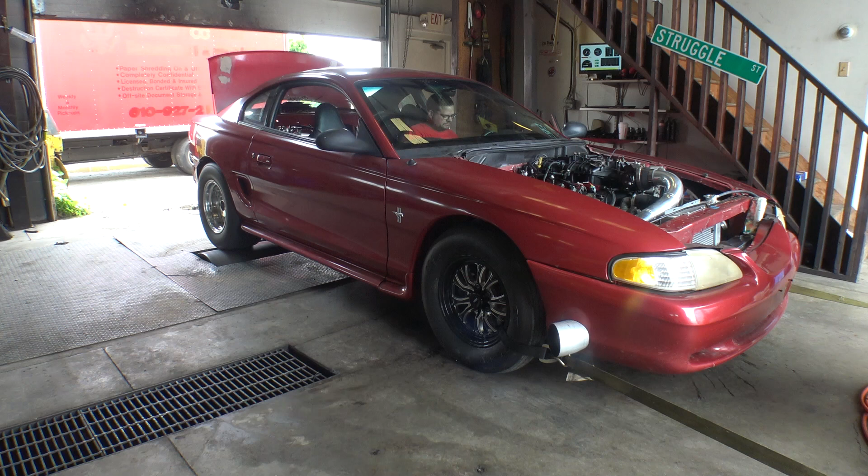That time, boys. Showtime. Oh, yeah. Oh, get her squared up.

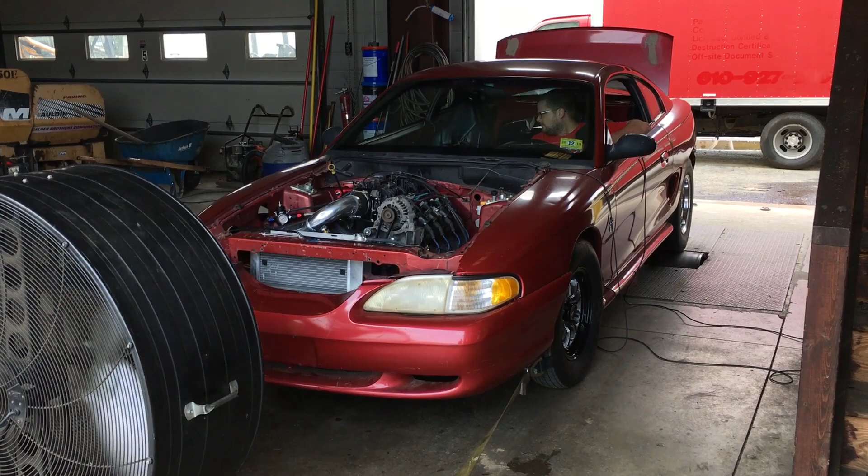Alright boys, so it was around this time we started noticing a significant misfire. A little bit at cruise and idle, and obviously a really crappy misfire once we tried to put it under load; we couldn't even make 6 pounds of boost. And we had spent most of the morning swapping out parts, starting with injectors and coils and plugs and a whole bunch of stuff. It did end up being the coil packs that I had were just awful.

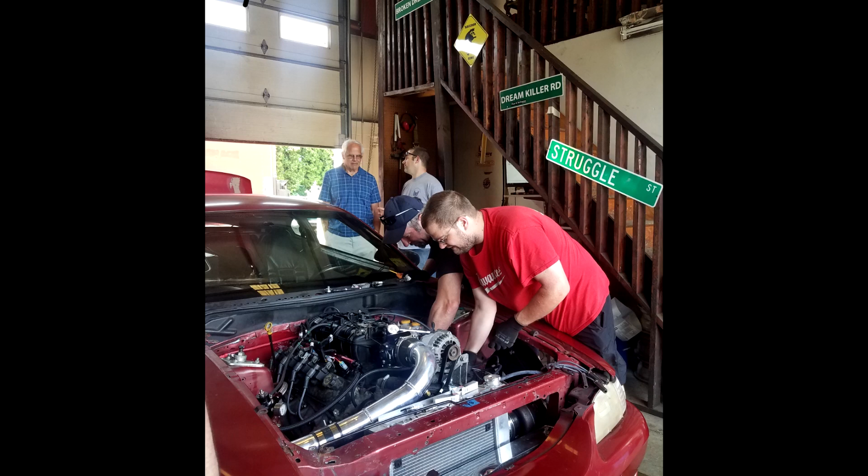So quite a struggle in the morning with just shotgunning parts at it, because I just didn't schedule a car in the morning so I could get my car on for seemingly some quick hits, which ended up being a bunch of time spent diagnosing an ignition issue.

Blew the pipe off the front. It sounded like it. Yeah, charge pipe action. I heard it, and then I looked at the RPM to make sure it was decelling. Yep. As soon as you lift it, yeah. It didn't shut the fuck off. No, it came up and hit 20 pounds perfect, so I was like, oh, what a fucking guess. Jesus Christ. That's easier than putting the air to fucking...

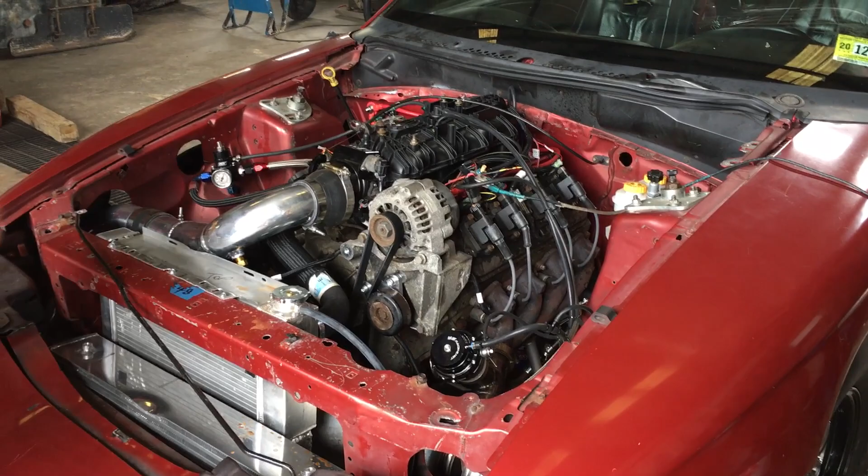Mark's like, what do you want to do? I'm like, oh, I'm going to rebuild the fucking output and do pulse width modulated, blah, blah, blah. Change it. I'm like, oh, fuck it, 50%. And I whacked the whole table. Well, I did 100 down low to like the turbo better, which I think it did. Yeah. And then I whacked it with 50 flat, so it's doing boost control through a simple output right now. So it doesn't do anything until it hits like a pound or two, and then it enables the output. And then I have it at 100.

Also, another funny situation I would like to explain is that halfway through the day, after we got our ignition fixed, my regulator died. The one I always use for like the last 3 years finally died while trying to tune my own car. So funny how that stuff always happens. But the regulator wouldn't add any more than like 13 pounds of boost, and we ended up taking the regulator off and finding out the regulator was busted.

So that's why we had to finish tuning the car with just the pulse width modulated Mac valve, like onboard boost control, but that's why we couldn't, spoiler alert, make any more than 20 pounds of boost, because my regulator was dead and all I could use was my onboard air and what was left of my low, like 5-pound wastegate spring. So, anyway, let's continue on and show the spectacular dyno pulls and call it a day and go over the data.

You got the camera rolling? Just started it. All right. Party time.

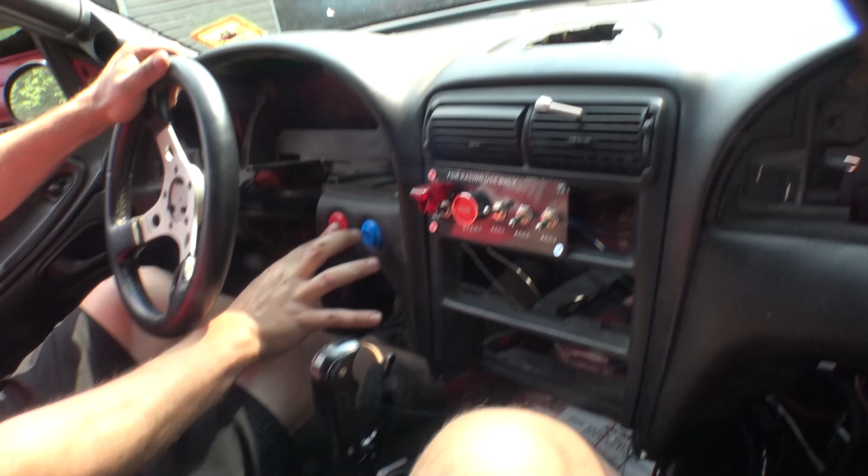On the trans brake. This is the brake and that's the bump. Yep. So, right? That's right. We're good? Oh, it hooked. Yeah. It hooked. It didn't spin a drop. I know. Back my head against the fucking seat. I love it. I can't wait. I mean, that was...

As you can see here by the dyno charts, it was not an easy day, but we ended with a huge success in my opinion. The car had to make 700 horsepower at least to be relevant. It has to weigh not that much. It has to 60 foot really good at 700 tire. The stretch goal was 800, which I think for sure it will go, because I had to quit tuning because I couldn't produce any more boost and I had another car on at noon. So I was happy with the 730 at 20 pounds.

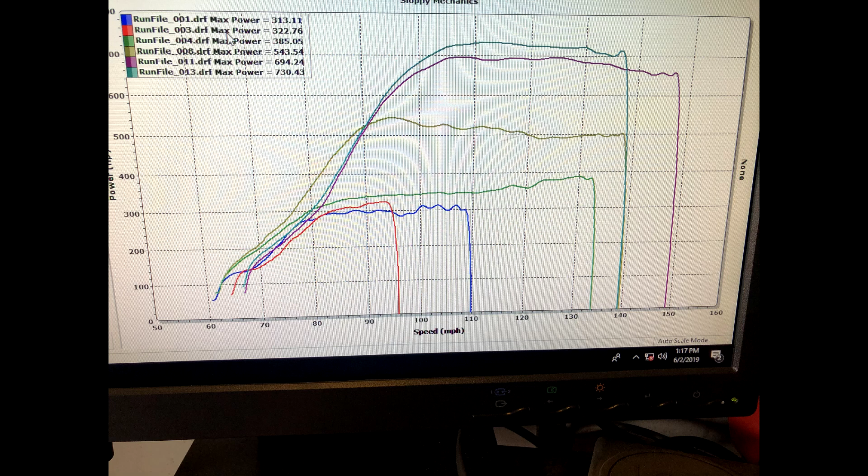Very happy with that. It was gaining 35 horsepower per pound above like 14-ish, where we started really slamming it because I didn't want to waste time. So my assumption is it will go all the way to 800 tire, and if this weighs in the low 3,000 range, should be a fairly easy 8-second pass as long as we get it to hook and everything else. And you guys know the rest of the story. So very happy with it for now. So we can go over some data logs if you want to. Okay, guys, so we will jump into some logs here.

And a lot of these were just serious issues and swapping things around. So, this is where we thought we had no miss. This is where boost control wasn't working. This is when we started putting shop air on. And this is when it hit nearly 20 pounds. So we'll jump right into this data log.

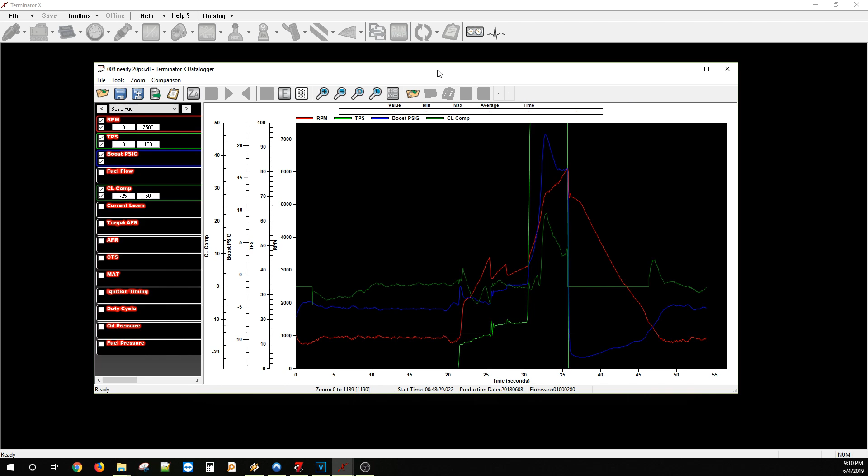So this was my first hit with boost, and I put almost no ignition in it. So what do we see here? About 5 degrees at probably peak torque. I wanted to see what it would do. So it hit 21 pounds, had 5 degrees at peak torque. Up top, boost fell off, which was another indicator that the regulator was not working. But what we do see is important here is fuel and oil pressure are good, manifold temp is outstanding, air fuel is good, everything else is happy.

But I was like, why is boost falling off? And I'm like, you know what? I think my regulator is still bad. So we messed with the regulator. We found out that it was in fact bad, which just kills me, crushes my soul. So what I did here was I went right here to try boost control, and I tried onboard boost control, and I believe I had an issue here. It would come up to target and then fall off.

Yeah. I did not have time to remedy this. I was getting annoyed that I just did not have the time to hash this all out. I wish I had spent 2 hours in the beginning of the day figuring this out, but that's just not how it went. And I'm sure some of you will rejoice because, man, I have exceedingly good luck, and it was just fighting me.

So I set up a permanent output and just locked it at 50% real quick to do manual boost control. And lo and behold, as we can see here, I got 20 pounds, and it held all the way with the boost controller. So that's another reason why we confirmed that the regulator was bad. And I threw a little bit of ignition in it. So I had 16 down low and 17.4 here. So this was the first hit on 20-ish pounds.

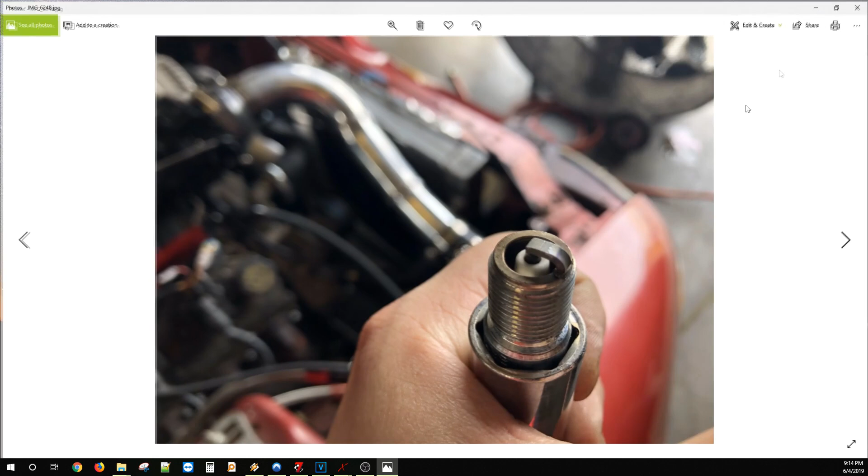That's laughable, it almost looks fake how little it has come up. And what's amazing is that's on 21 pounds. I can show you a picture of the plug - still looked fairly conservative. I got a picture of the spark plug right here, and it is still on the tabletop, not at the bend.

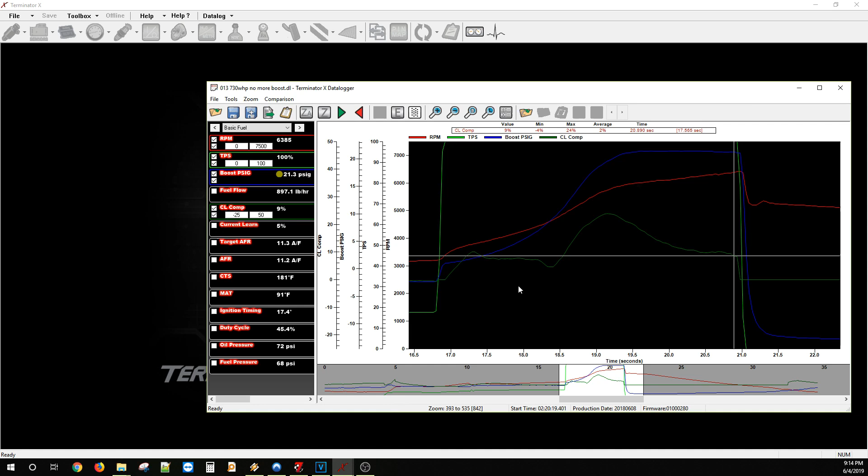What I said to Mark and a bunch of other people was a setup like this would possibly take 20 pounds and 20 degrees because of the small cubes, large turbine, big exhaust, high quality fuel, etc. I said I've done a bunch of stuff like this, they'll take 20 pounds and 20 degrees up top. So it got close to that. The inlet temperature is amazing.

One of the things I'm keeping in my back pocket is a little bit more ignition. I would have loved to make 800 horsepower because it was making 30 to 35 horsepower per pound, depending on how much ignition I had in it. I could have easily added 2-3 pounds and picked up 60-80 horsepower, and it would have cleared 800. But that's one thing we can bring it down and dyno another day, maybe try the other camshaft, or just go straight to the track and target 24 pounds with a little bit more wastegate spring.

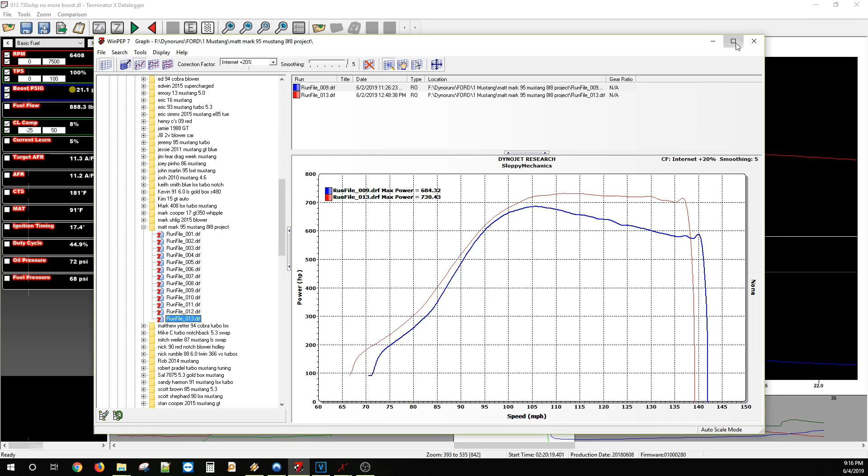Another thing you can see here, at 9 - what was 8 like? 8 was pretty awful, let's get rid of 8. From 9, this was the compressor hooked up, the regulator was nosing off, and then this was the onboard boost control holding boost. So the power band and everything was better without the regulator crapping out on us.

But anyway, I'm extremely happy with those numbers for 20, 21 pounds of boost on this 4.8 with different compression ratios, one paper head gasket, one steel gasket, different heights per side.

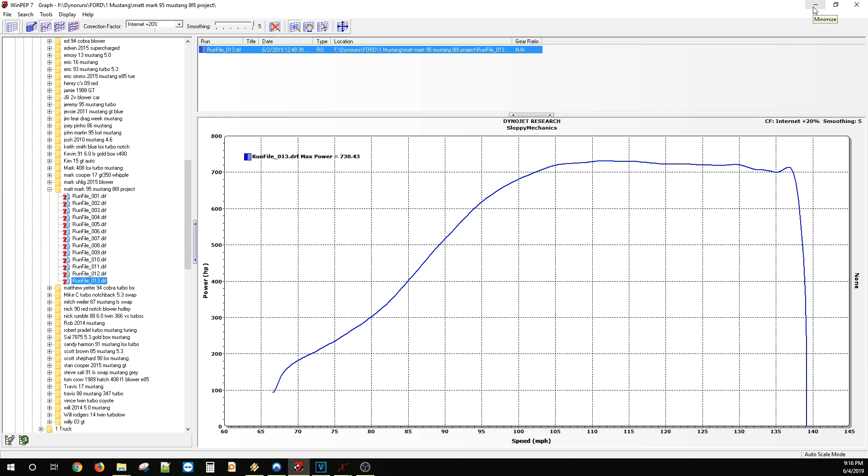Everyone's like, that's not going to work, you're a moron, you should have done both gaskets. And this is why I do what I do, because what we learned here is none of that mattered. So just to reiterate, those people were wrong. The car was fine on the dyno, we didn't push any coolant, everything was good, head gaskets are intact, logs look good, everything else looks good, fuel consumption looks good. I like where everything is. The converter is doing great with the horsepower.

So it's time to see how it does at the track. Hopefully in a week or two we get the cage burned in and we can go right out and start making hits with the thing and see how it does. If it hooks well and everything else, I'm assuming you're going to see close to, if not an 8-second pass relatively quickly from Mark, because he is very good at setting up a car and driving a car. So he will handle that aspect pretty quickly and efficiently. If you don't know who he is, you should just know that he's going to get that done.

So all I had to do is produce the power. What we see is not exactly how much we would want. I would love to clear 800 - it would make 8s much easier. 700 is going to make it harder to reach that goal.

But what we saw, we ran out of wastegate spring. I'm reiterating, but we ran out of wastegate spring, couldn't produce any more power for the day, and I ran out of time. I was happy with that number, I was happy that the car didn't explode. Everything else - take it home, change the oil, check over everything, iron out the boost control, get it set up for the launch, all the internal software things that we need to have a successful day at the track, and create a video and report back, and maybe even do a cam swap in the meantime.